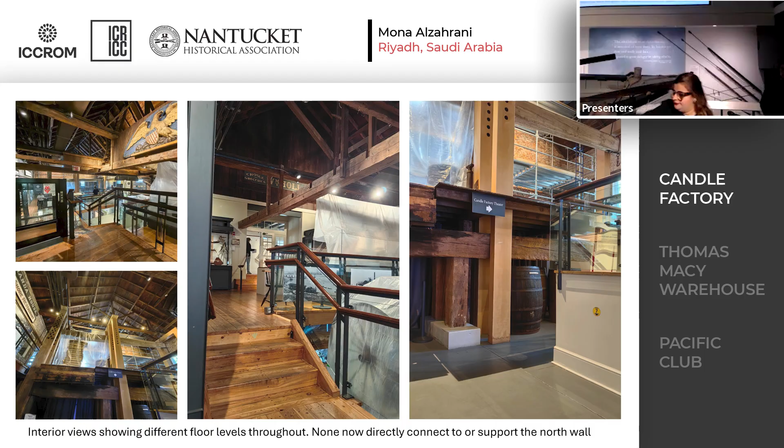The significance of the site: the candle factory, built in 1847, represents Nantucket's rich maritime heritage as part of the Hadwen and Barney oil and candle factory. It played a pivotal role in the island's 18th and 19th century whaling industry. The factory symbolizes the innovation and prosperity of its time, producing whale oil products that supported both local and global economies.

Today, the building is beautifully integrated into the Nantucket Whaling Museum. It has preserved its 19th century facade and ironworks, a testament to adaptive reuse, continuing to educate and inspire as part of the NHA's mission. At this point, I'd like to hand over the presentation to Andrea Richards, who will guide us through the material assessment and condition analysis of the candle factory.

So in order for us to fully understand what we're looking at for the condition assessment, we need to understand the materials that we're looking at. We did this by elevation. In the north elevation that you're looking at, this comprises asphalt shingles, timber eaves, brick masonry and mortar, single glazed timber windows, timber doors, granite lintel, granite masonry and mortar, and metal guttering, as well as a masonry chimney.

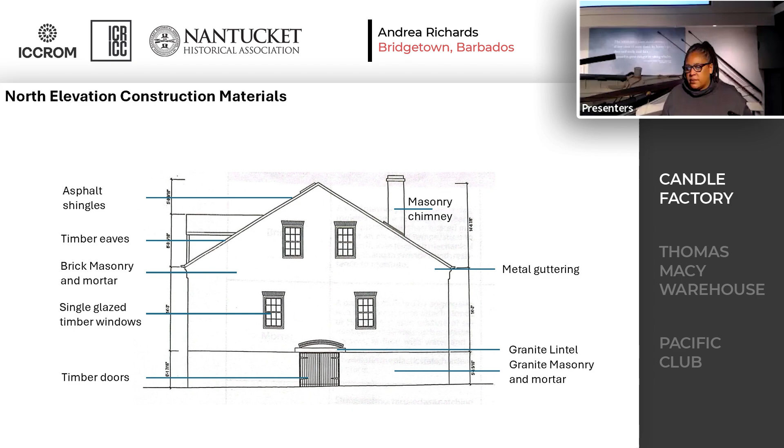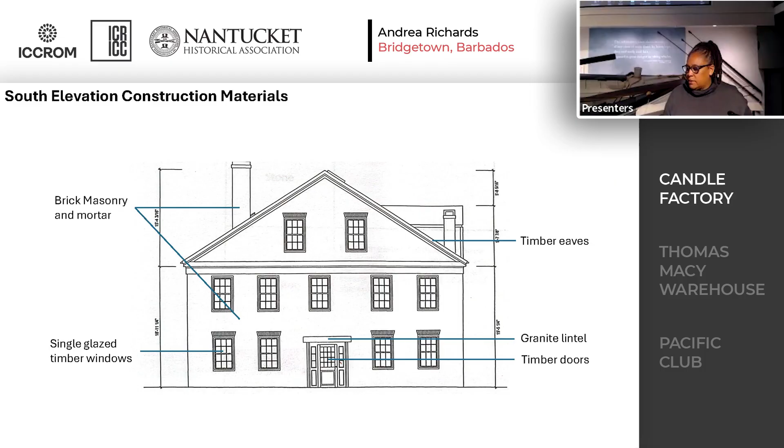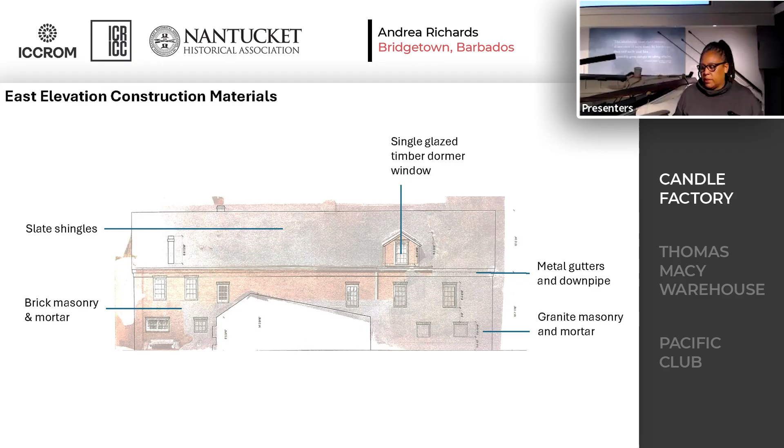For the south elevation, we have again brick masonry and mortar, single glazed windows, timber windows, granite lintel, timber doors, and timber eaves. We also assessed the eastern elevation where we had some slate shingles, brick masonry and mortar, metal gutters, and again some single glazed timber dormer windows, and granite masonry and mortar. I'll also add that from previous work done on the building, there was some cement in the mix as well.

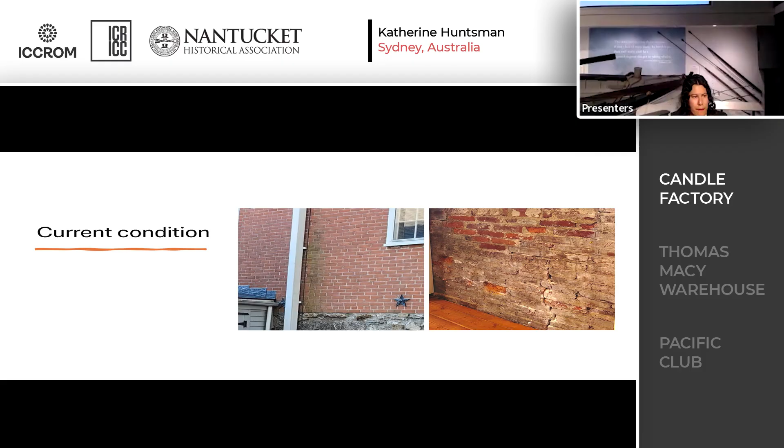This leads us to looking more deeply at the current condition of the former candle factory. I'll start with the west elevation, which is just here off to my left, your right, which we don't have a sketch of. But you can see that this western elevation was once an exterior wall that has since been incorporated into the Whaling Museum. We need to remember that this was once an external facade that experienced some of the weather we've been feeling outside today - the chill, the rain, water - and some of the other impacts that we observed on the other elevations.

So the south, what is now the front of the museum shop and the candle factory.

We observed some mortar loss at the base of the building at the southeast corner, as well as delamination of the paint around the windows from UV exposure from sunlight, because this is the elevation that gets the most direct sun and UV exposure.

Moving around to the back of the building, the north elevation, you may just be able to see through those top windows there, covered by scaffolding. This is the elevation that is undergoing the most intensive conservation efforts at the moment.

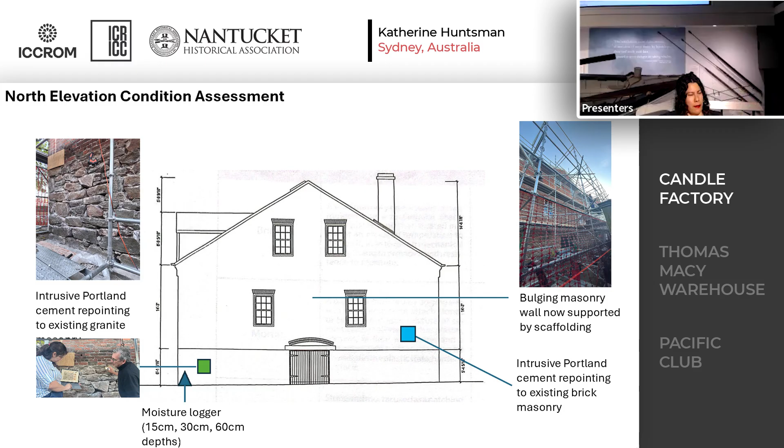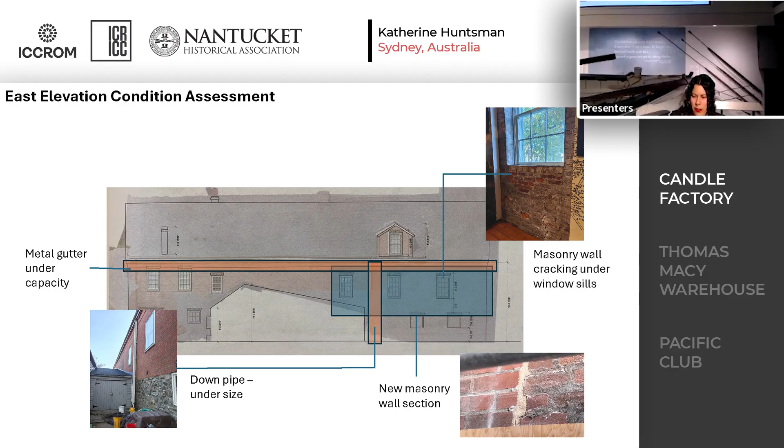At the east, we observed metal gutters and downpipes, rare for Nantucket in our understanding, though we suspect they may be under capacity for the amount of stormwater they are receiving, as well as cracking of several significant shapes and sizes throughout, particularly under windows and between the old and new sections of this masonry.

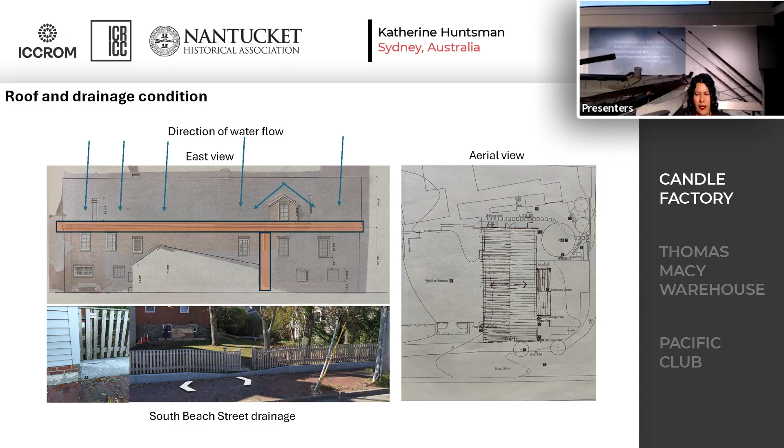We did a short study on the stormwater path and drainage of the roof into the garden at the back, what is now the garden at the back, onto South Beach Street.

The indoor environment of the candle factory, now museum interior, has been kept constant at what we like to express as museum best practice of 50% relative humidity and 22 to 23 degrees Celsius, or 73 Fahrenheit museum conditions.

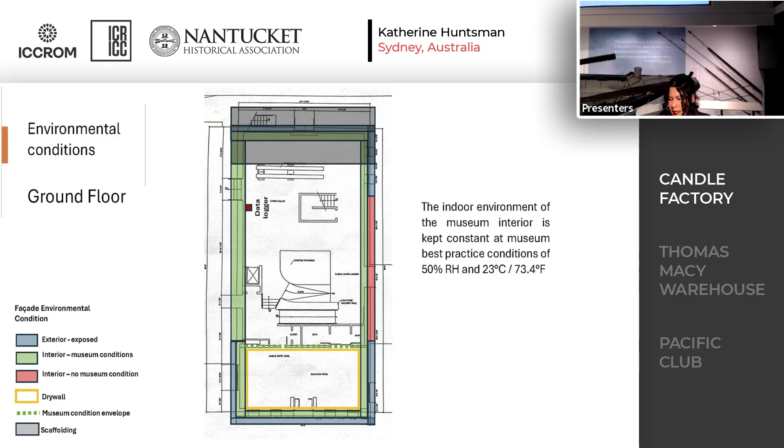However, this creates a disparity between the internal and external temperature and relative humidity of the site, which is actually degrading the masonry brickwork in the envelope of the building, as it's keeping the condition of the collection rather stable inside. And this continues onto the first floor.

This creates conditions for efflorescing salts, masonry cracks, and as I mentioned before, a lack of support for the entire north wall structure.

We also might see today, if this rain keeps up, some moisture ingress into the building. This collects particularly in the lower parts of the subfloor, and this has been observed previously at the bottom of the elevator pit off to the side here.

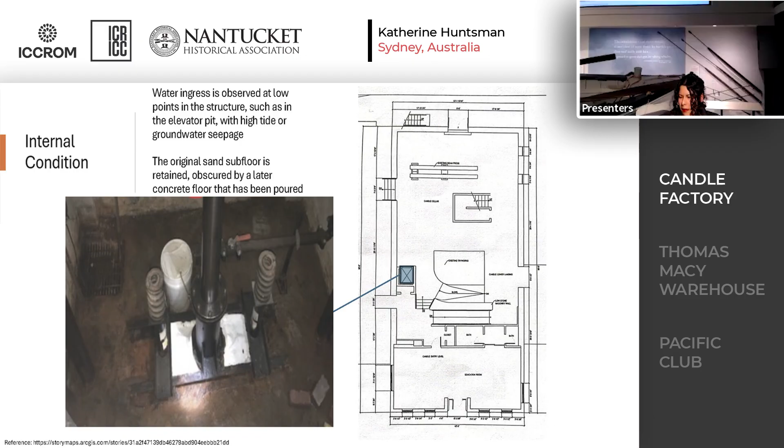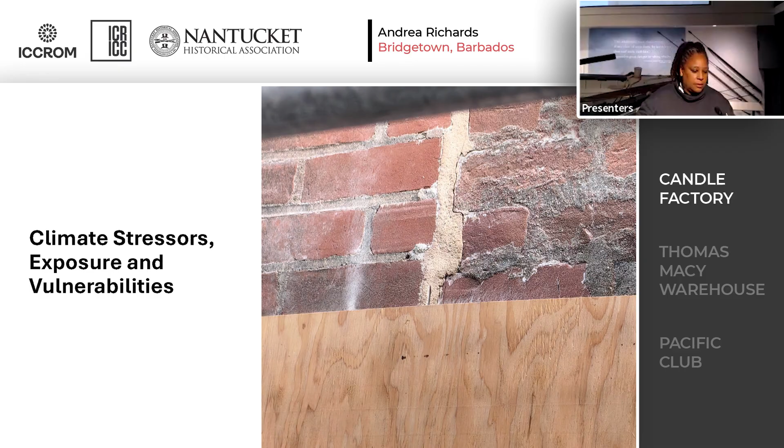Right, so now we go into the climate stressors and exposure, and in looking at our climate risk statement...

Due to higher sea levels as projected and the fact that we'll be having more flooding, this should continue to threaten the candle factory, simply because sea levels are expected to rise by 0.5 meters by 2050 and 2 meters by 2100. So what this leads us to is that the candle factory faces increasing risks also from biological growth, salt deposition, and moisture issues over time.

We estimate or project that 70 annual flood days are projected by 2050, and persistent flooding by 2100.

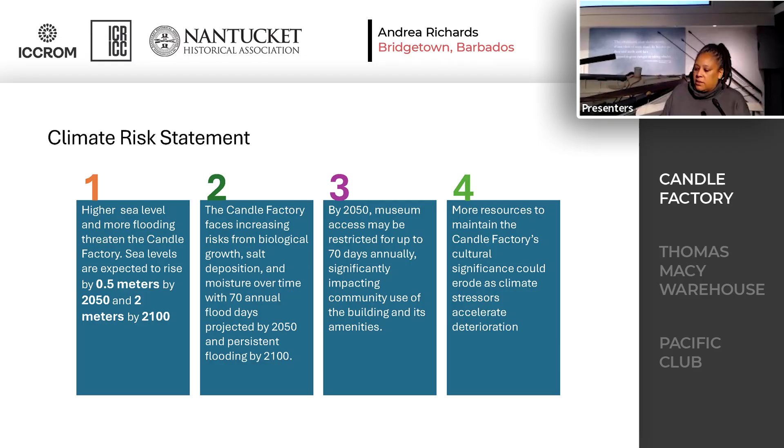By 2050, the museum access we believe will become restricted for up to 70 days annually, significantly impacting community use, the important social and cultural values of the site, and this will limit access in terms of the building and its amenities. So this will require more resources to maintain the candle factory's cultural and social significance, because this will be eroded as climate stressors accelerate and result in further deterioration.

Okay, moving to the prominent climate risks. So we identified that these are most of what we could observe in the different locations of the building: the rising sea level, flooding, increased precipitation, and erosion.

In terms of data, the sea level rise is a critical concern, as I said before, especially taking into consideration the location of the candle factory. As historical data and future prediction shows, by 2050 the predicted sea level rise at the site will reach 1.6 feet or plus 0.5 meters of the building, and by 2100, this could reach 2 meters or 6.5 feet.

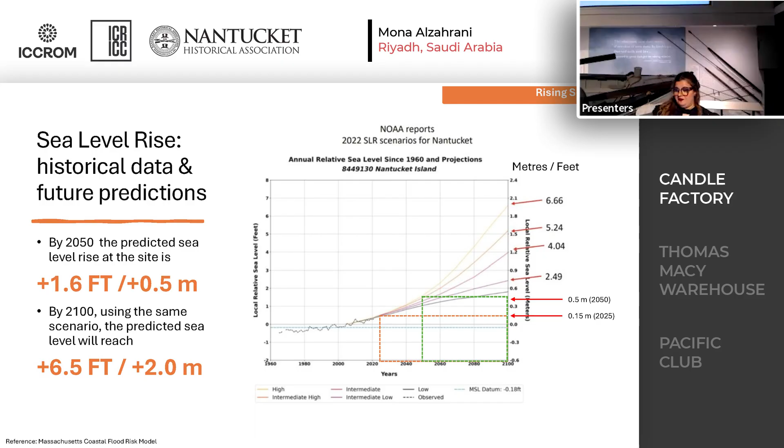The threat of flooding is both frequent and severe. By 2050, 70 flooding days per year is expected, as shown here in the data, and by 2100, the candle factory could experience permanent flooding. This will exacerbate structural deterioration and limit community use and accessibility to the building. The combination of high tide and increased precipitation highlights the urgent need for drainage improvements and flood barriers.

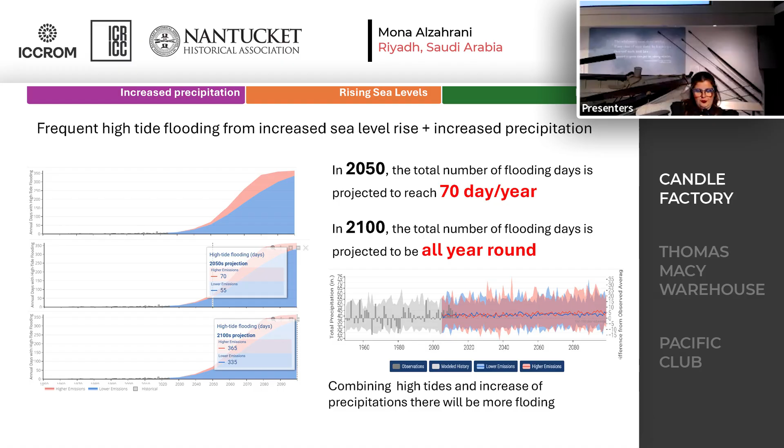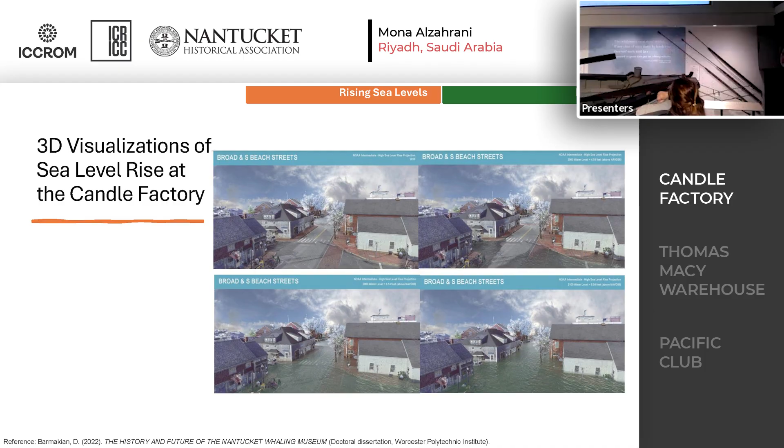And as my colleague here, Jose, will build on, these are some 3D visualizations. We found them nice in one of the NHA publications. As you can see, how the building will be flooded.

This rise of the sea level will affect the facades, causing an increase in humidity in masonry that will bring more salts and efflorescences in the walls. In the brick masonry, this will affect the appearance.

We possibly can recommend temporary water barriers. Those are available in the market for immediate stop of the water. We will show you later some pictures about that. And of course, the need of increasing the regular maintenance of the facades. That will be for the short term.

For the long term, something in the infrastructure of the houses, I mean the urban planning, should be done in terms of improving the drainage and also designing water permeable streets, which we will talk about later.

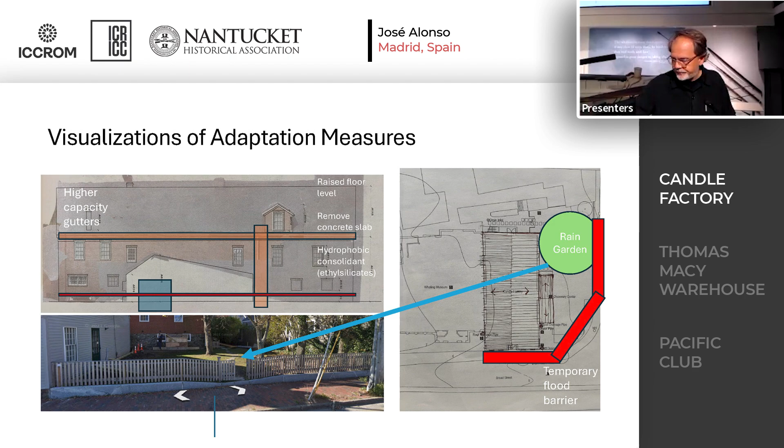So these are some sketches for strategies for reducing the hazards. On the left are commercial water barriers available in the market. They are prefab and can be installed in hours.

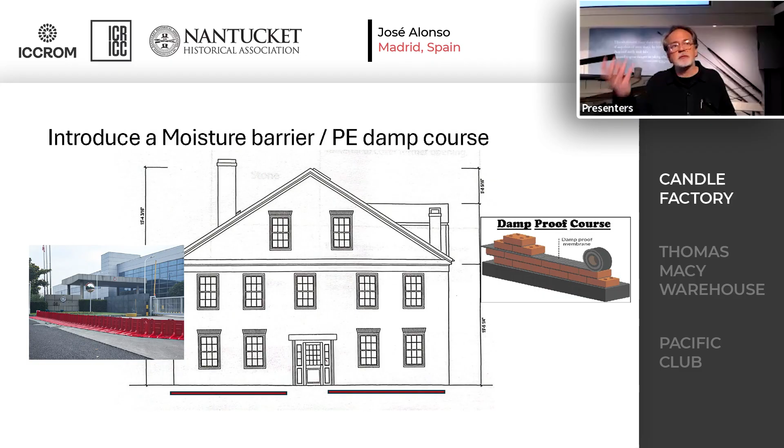We're also thinking about creating climate volunteers in the community who could help the museum, because we foresee more help will be needed for cleaning and assistance. On the right, the damp-proof course is a well-known conservation solution that helps prevent the water table from rising up the wall.

This is a sketch of the raise of the floor level. And that's all, we are open for discussion. Thank you very much on behalf of the whole team.

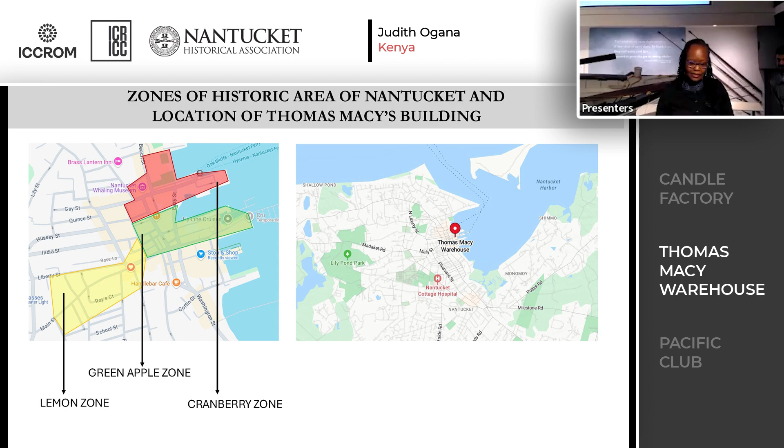The historic district area has been divided into 3 zones as a beginning to work on this project, and we have been working on the green zone. We're going to look at the Thomas Macy warehouse, where it's located on 12 Straight Wharf.

Based on the issues and property uses, we divided the zone into 4 subzones: the red one along the sea; the yellow and purple ones, which are most affected by flood and are mostly commercial uses; and the green area, which is mostly not affected by flood but is affected by rain.

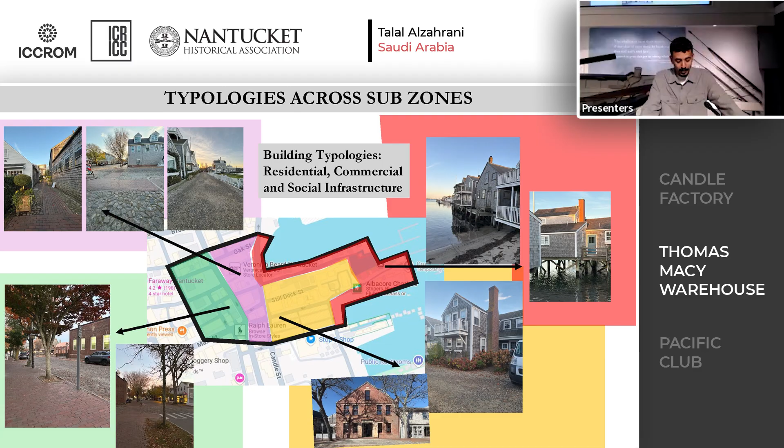This slide shows the variety of structures, streets, and walkways in this area.

Significance of the area: the district highlights the island's role as a 19th century whaling hub. The area has well-preserved buildings and cobblestone streets that reflect its past. The district offers educational opportunities to explore history, architecture, and traditional life, while also building a strong community spirit among locals and visitors.

Area-level condition assessments and issues: we found structural and non-structural issues, superficial and surface issues, water management issues, and policies and planning issues.

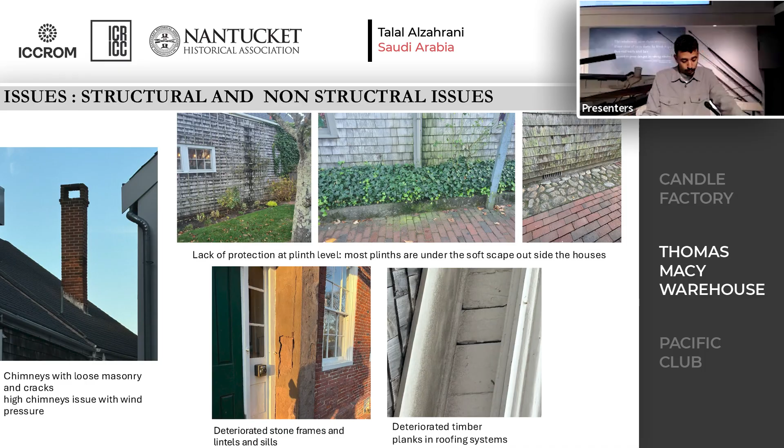This illustrates structural and non-structural issues, showing unprotected foundations, weak chimneys, and damaged roofs. We can also see other issues like structural cracks and weak conditions.

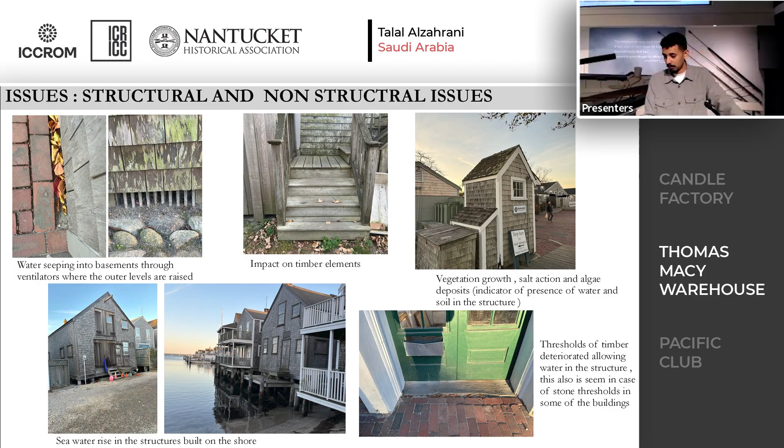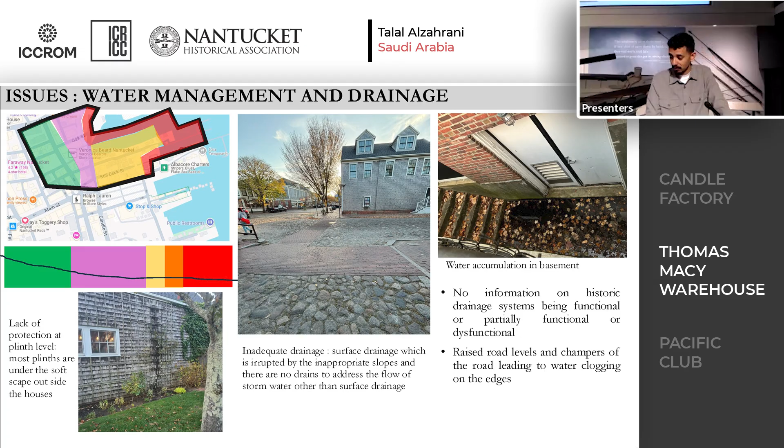Water management issues, including unprotected foundations and water accumulation in basements. Here are the issues of the water management, drainage system, and foundation issues as well.

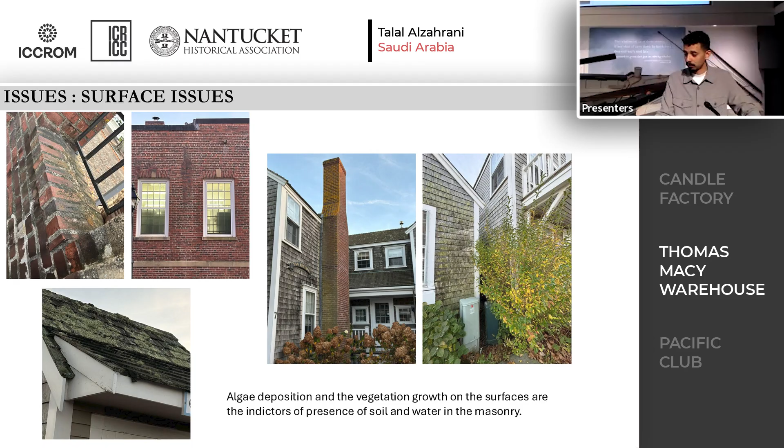The surface issues include moisture and vegetation growth.

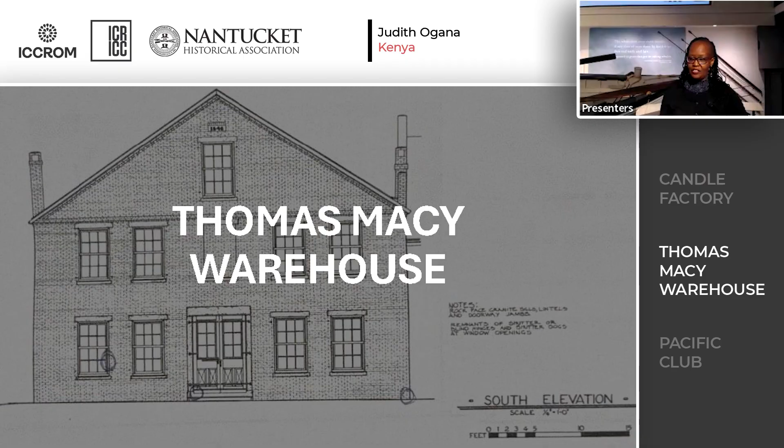Now we'll get into the building-level investigations of the Thomas Macy warehouse. We will start with the historical background, spatial planning, building description, then get into the elements and materials, condition assessment, and the causes of the conditions.

For the historical background, like the other team, we got quite a number of photographs from the archives, but we also recognize the importance of the history of the building, which was built in 1846 after the Great Fire. It is strategically located on the active waterfront on infill land. It used to be used as a supply store, dealing primarily with marine outfitting, and it is impressively built in Greek Revival industrial architectural style.

It has changed hands to several owners, including Macy's sons, who used it as a chandlery and warehouse. In 1905, there was a carpentry shop, and in 1944, the Nantucket Foundation Incorporated took ownership.

It has also been affected by events, including the Atlantic hurricane of 1944 and the floods in 1991. All that to say that it's an important building in Nantucket.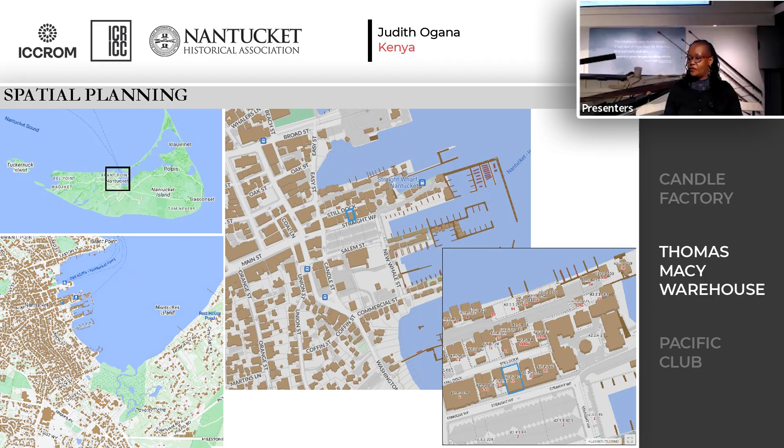In terms of spatial planning, you'll see how it is situated within the island. It's very important location-wise, currently very strategic, but also previously and historically for the whaling business, it was critical as well. The current scenario is shown in these photographs. The extent of the structure was larger than it currently is.

The main street connects to the ferry port. As you see the pictures on my right, that was the original entrance of the building, and the stairs were external. They have now been installed on the internal face of the building.

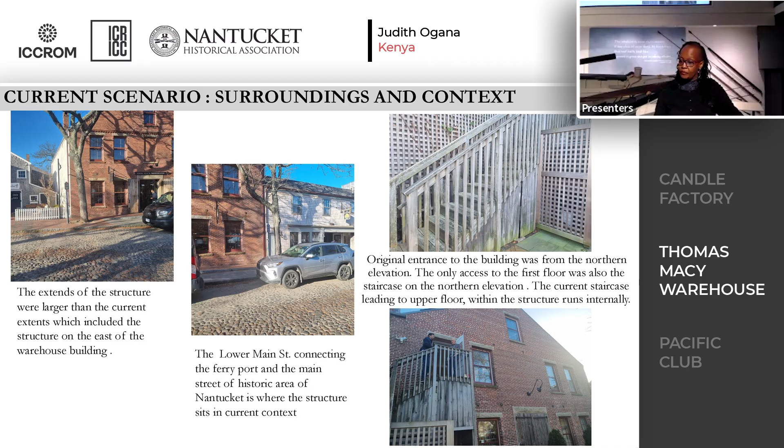Archival information is really important because it gives us a good sense of how the building has evolved. The first photo we have is from the 1960s, but there's also documentation from when it caught fire in 1944 and how it looked then, as well as the interiors that have a very strong aesthetic look that has actually been preserved over the years.

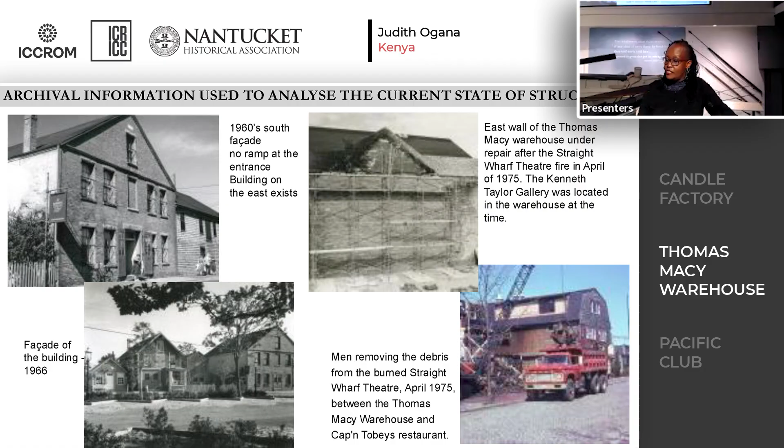You can see from the first photograph that the building did not have the ramp and the entrance. There is also documentation of the scaffolding and the work done when the building caught fire again in 1975, and the building works that happened thereafter.

Going on with the archival information, we see that the warehouse's west elevation had a different sort of architectural language, as well as the back door of the Macy warehouse in the middle photograph.

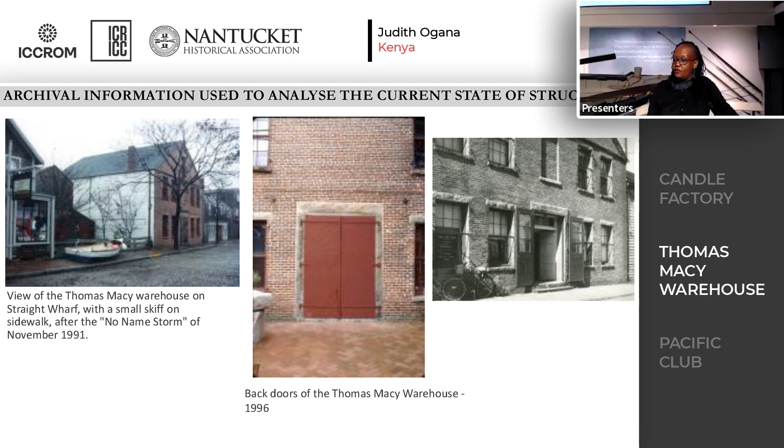In terms of architectural description and the floor plans, we will get deeper into the language of the architect. It houses an art exhibition space approximately 45 by 42, holding a grand hall and a vestibule. The walls are mainly brick in lime mortar, and the roofing consists of timber planks, timber joists and rafters. Flooring is timber planks with some concrete flooring, and the doors and wood windows have timber frames, sandstone lintels, sills and sandstone frames.

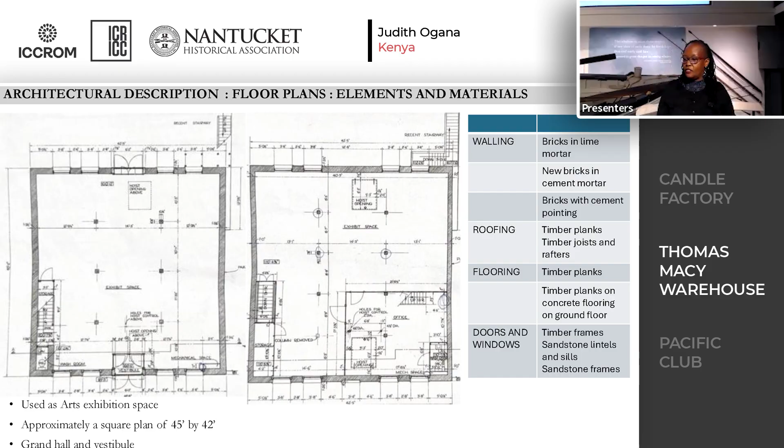So from here, I'll ask Ridhima to proceed with the presentation on the architectural description. Ridhima.

Hi everyone. From here, we'll largely be covering our methodology to assess the building on site, how we identified the issues the building is having, what the causes of those issues are, and then the proposals.

I'll take you through this slide, which shows the materials on the south facade and the condition of the building there. We've done this for all the facades, floors, roofing and RCPs, but we've just put one sample and a few other examples on these slides. As we see, the roof is slate, and the building is brick and lime mortar masonry.

There are sandstone lintels. Historic brick masonry in lime mortar is what we see on the facades, and there are timber panels on the door. The parapet was added later, and there are gutters and rainwater pipes. Sandstone lintels as well as sills are on the upper and lower levels. So this is the kind of material palette we see in the building on the southern facade.

There are some interventions in historic bricks, which are just cement pointing. The major issues this facade is dealing with are loose masonry with loss of mortar because of water ingress. We see both kinds of defects.

There is water seepage from the upper rooftop, and there is water rise as well. So what are the causes of this? I'll further cover. We also installed some moisture meters to identify the areas where water moisture is rising as we go up, or where it's decreasing, so that we know whether water seepage is coming from upwards or downwards.

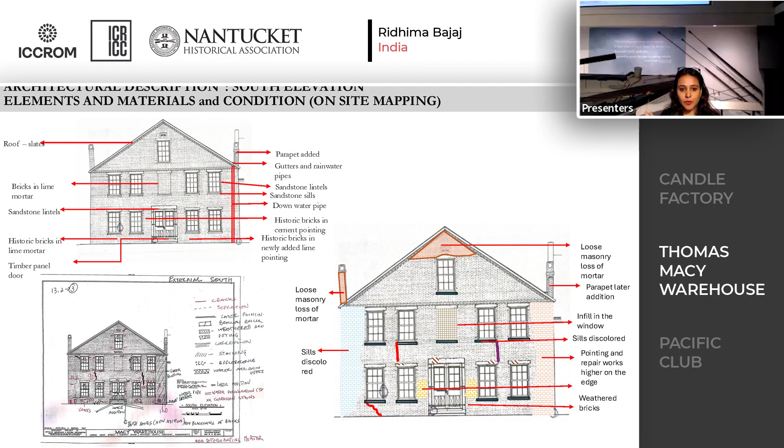That gives us an indicator of what is happening in each part of the masonry in terms of water seepage and water rise. We also see that the bricks were weathered and pitted. This was all water action as well as salt action, since this building is largely built on infill land over the sea, and the water table beneath it has a lot of salt. When the water rise happens, it leaves a lot of efflorescence on the brick and decays the mortar. So we are losing the mortar, and the bricks are getting pulverized, and on the lower courses it's seen much higher.

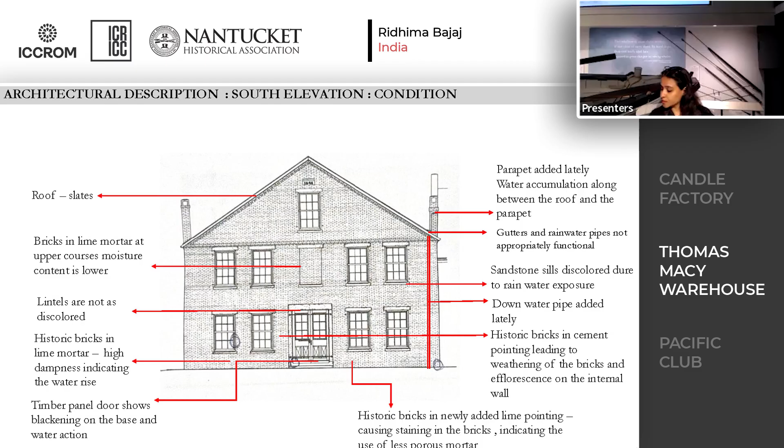Considering each facade separately, that's the condition of the south facade, which is a little more elaborately put. Whereas if we consider the west facade, we have a plastered wall.

A very interesting thing is that this plastered wall is not allowing the water to percolate, or it's not allowing the water to breathe. So the internal wall of this facade is actually seeing much more decay. The lower courses are much more pulverized, and the water moisture content goes up to 20, whereas on the other facades it is mostly 17 or 16. So the range of moisture is very high on this facade.

Then if we also look at the timber on this facade, it shows a lot of damp. The moisture content in the timber is very high, which is very rare to see, since timber doesn't hold water as much. But when we consider this facade and the structural system and check the timber moisture, the content is very high. So therefore, a lot of water is trapped on this facade.

If we go to the other facade... okay, so yeah, this is interesting. After doing all these studies, we also came up with a few questions that we need to answer through further investigation. One of them is: the moisture content decreases as we go upwards, whereas the action is opposite on the southwestern edge of the elevation. Why is that happening? Another question that arises is, when was the parapet added?

Through archival pictures, we do not get that information, but we do have certain kinds of information, such as that if the ramp is added in a particular period, the brick course masonry and plinth go below the ramp. This is an accelerator to water rise action and does not allow the water to breathe through the plinth of the building.

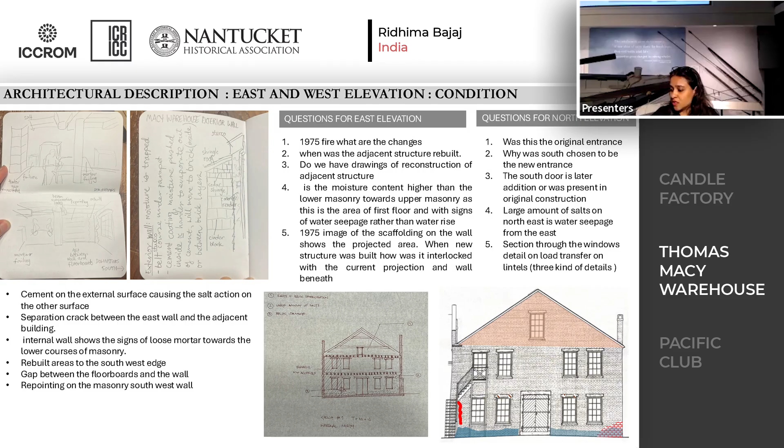So we have done a similar exercise. I'll just pass through this - you can ask any question for a particular facade if required. This is for the east elevation and west elevation. Then we have done a material-wise assessment of the kinds of issues seen in each of the materials. For brick, we see weathering and pitting - these are the kinds of different problems.

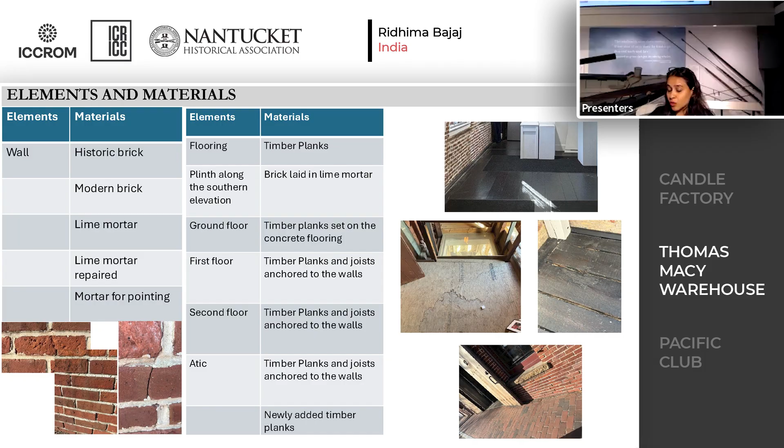Even what are the materials, which element is holding which material—that kind of assessment we have done through this study. So these are elements and material assessments.

Then we have assessed the building in terms of issues. We have divided into structural issues, non-structural issues, and surface issues, and we have found the cause of the issues and the accelerating factors which are increasing them.

Structural issues: we have looked into the cracks which are in timbers. These timbers are all supporting members, the roof structural timber members, which have heavy cracks. There's separation on one of the facades from the adjacent building. There are opening joints, cracks in the masonry, and cracks in stone lintels as well.

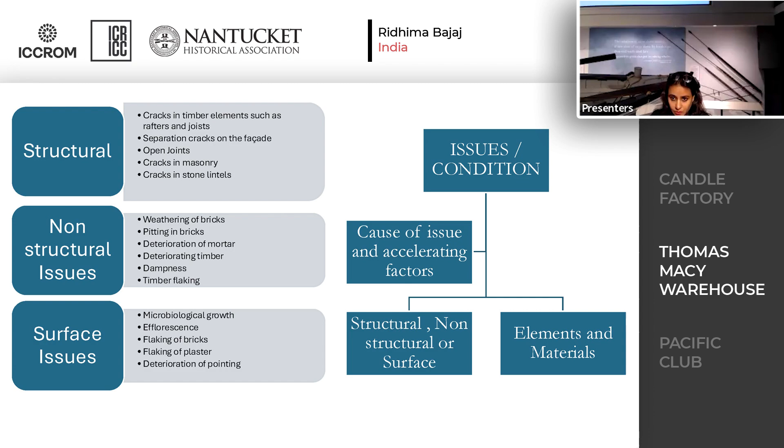The non-structural issues are weathering of bricks, pitting in bricks, deterioration of mortar, deteriorating timber, dampness, and timber flaking. Surface issues are largely efflorescence and flaking of bricks, but mostly this arises when there is water and salt in the building, indicating the presence of a lot of water and salt.

So that's a little more in detail—each structural issue shown through pictures. These are the non-structural issues.

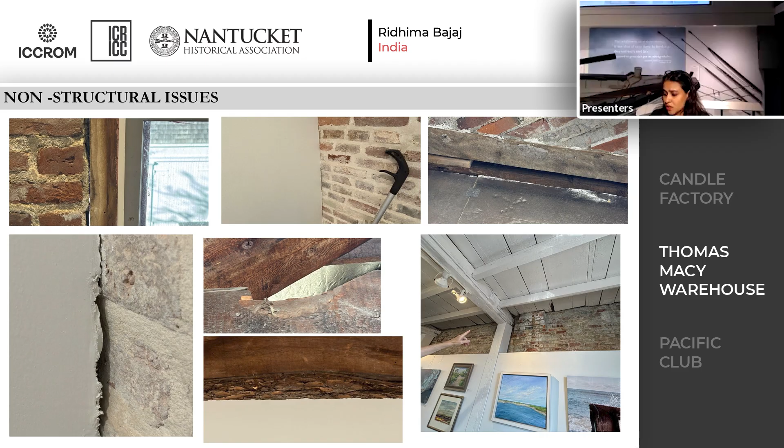We have done this understanding of each element—what materials it holds, what is the condition, and what is the cause of decay. We've just put one example here, but we have an entire study on each element, floor-wise, roof-wise, and wall-wise.

So this we have kind of assessed for significance. When we consider the material fabric of the building, we have considered it to be the value of the building, and the condition of the building is the risk to the building. We have given an assessment and seen which comes on higher priority.

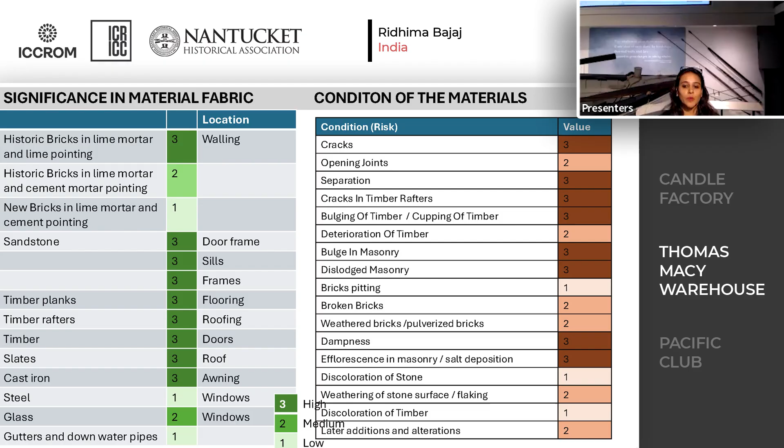If the value is high and the risk is high, we need to address it immediately—it becomes a priority. When the value is low and the risk is low, then it becomes lower priority to address immediately. So this is the assessment which we carried out.

Then we also have done a condition, material, and location study—where is it located? Because location matters: which material in the building is at what location, and therefore what kind of issues it's having. Water ingress can be one issue and pitting can be another, but where is it happening?

Is it happening on the lower courses of the masonry, or on the upper courses? That can have a different cause of the issue. So it's important to know the location, the material, and the condition to reach the cause of the problem. That's the kind of study we did.

And what are the underlying issues which indicate the role of a climate stressor? What is accelerating it? Suppose we are talking about flooding—the flooding is increasing the water ingress. So that becomes a kind of climate stressor for masonry being deteriorated or timber getting impacted. That's the kind of study we did in this exercise.

So we have chosen the climate stressor flooding for our detailed study, and the secondary stressors which arise are heavy rainfall and seawater rise.

Flooding causes waterlogging, which causes the water rise in the building, deteriorating the mortar and weathering the bricks, then weakening the walls, and the timber getting impacted, causing cracks and open joints. This is one of the graphics where we've done it for each material in detail.

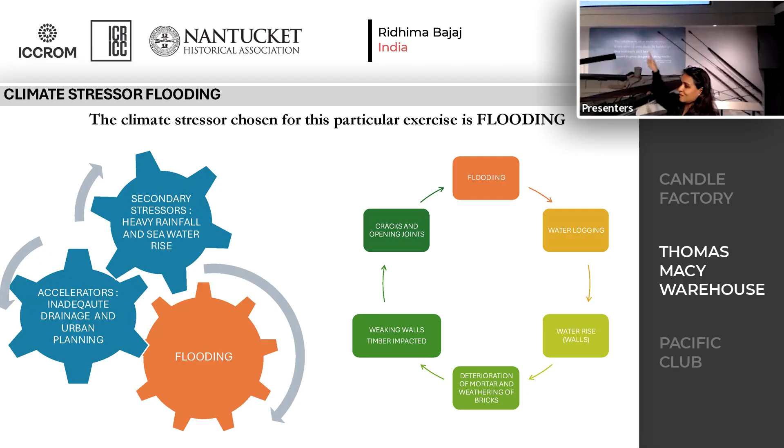So I'll go further. If we consider the climate stressor as flooding, the values of the building that are actually exposed are the settings in the surroundings of the building, the artifacts and paintings in the building, the external walls, and the roofing.

The vulnerabilities due to flooding: the access to the building gets blocked, and the ground floor of the structure gets flooded during the rainy season, which impacts materials as well as artifacts. The inadequate drainage and water management, and the gap at the policy and strategy level for management of stormwater drainage—including the interconnection between private buildings and public planning systems—is something that we found missing.

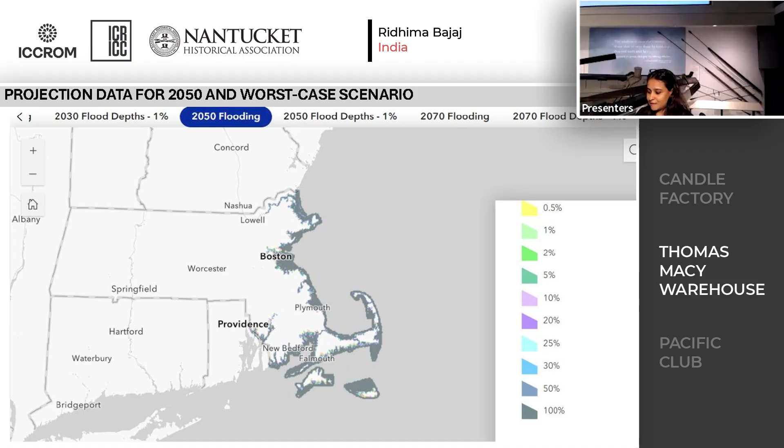So if we consider projection data, the flooding on the island, the coastal flooding, this indicates the flood risk map. If we see 2050 data, the island is flooded and part of the warehouse is completely flooded up to 20%, and this is above 10 feet by 2070.

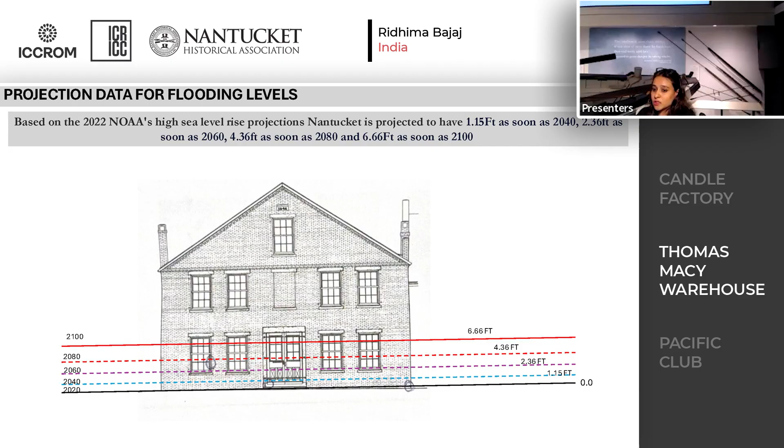By 2060, it goes up to 2.36, and by 2100, it is 6.6 feet, which means the entire ground floor is submerged into the building. So, Judy, could you please read this climate risk statement for Macy's building?

In terms of the statement, we say that Thomas Macy's warehouse is in an area prone to flooding, as you've seen. The number of floods were 6 in the 60s, 37 by 2017, and 75 in 2023, which shows a significant rise in the trend of flooding, translating to about a rise of 69 flood events in 65 years.

Approximate sea level rise has demonstrated a steady increase, with between 1950 and 2023 at 220 millimeters, and projected for 2050 at 450 millimeters and by 2100 at 1000 millimeters.

Macy Warehouse sits on infill land with underground seawater. There is inadequate drainage and inappropriate slopes around the structure. The gutters and drain downpipes are not functional. There is a gap in the interlinkage of private and public management systems of rainwater.

This dysfunctional stormwater management adds to the impact on the building. The building is of high architectural and associative value, with a functioning art gallery which is at physical risk due to flooding.

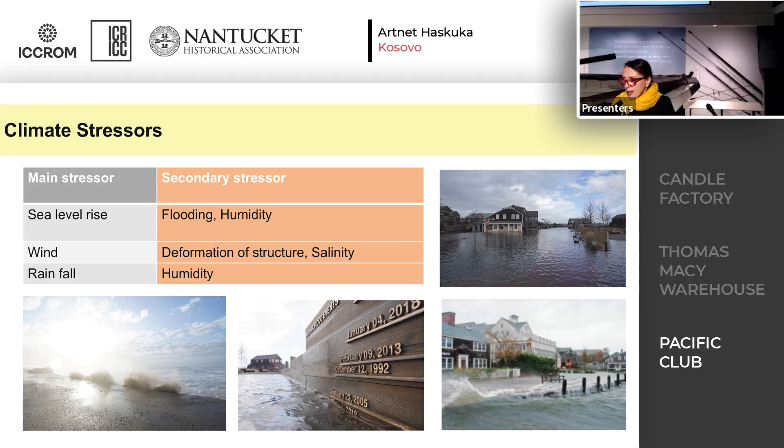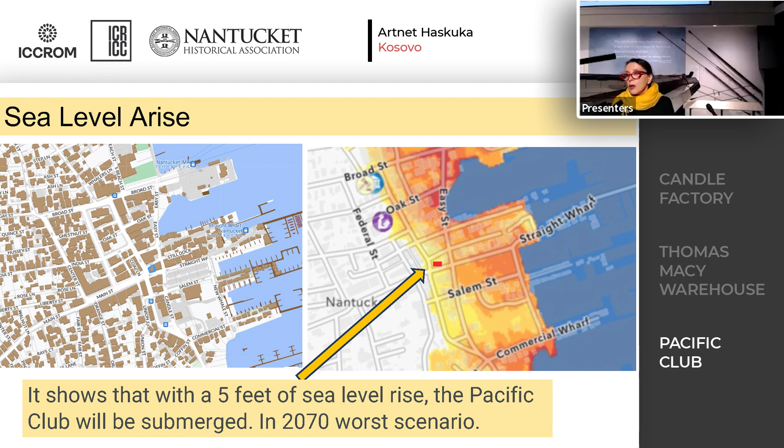There are some photos from the history of flooding in this area. We also analyzed a few scenarios, and in this slide you can see how the sea level will rise and the position of our building, where in 2070 the worst scenario is that we will lose this building.

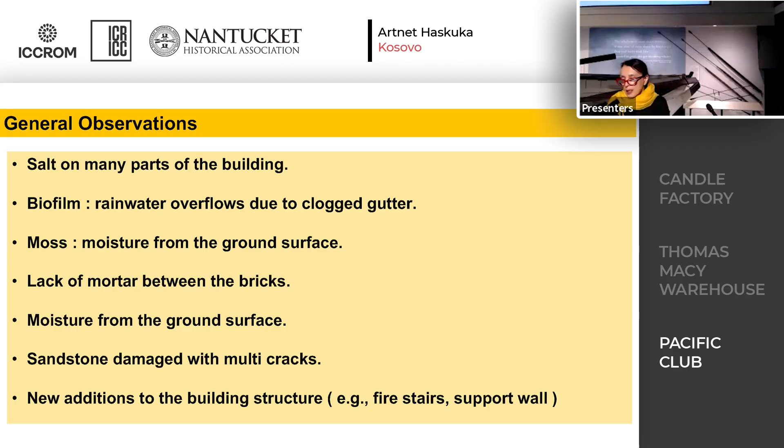Existing situation, as you see, it is not the best one. We have some biofilm and then cracks, some deterioration in the facade. There are general observations that we saw: salt on many parts of the building, biofilm, moss, lack of mortar between the bricks, moisture from the ground surface. Then sandstone is damaged with multi-cracks, and also there is a new additional part in the building structure.

Let's see from the west elevation. The northwest corner is the most damaged because the gutter is filled with a lot of fallen leaves, so the rainfall overflows and rainwater damages this corner, and biofilm has occurred. The rainfall is also causing deterioration of the roof surface.

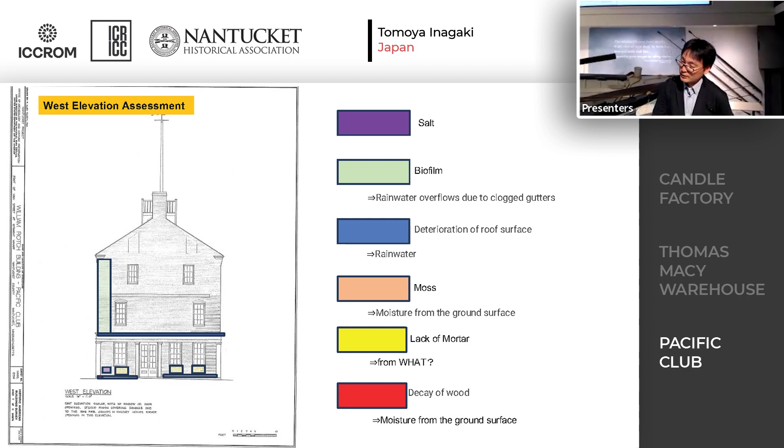Moisture from the ground surface has occurred. In the south elevation, we found sandstone damage like this. In the north elevation, we see new elements from the ground, like this additional stairs structure. The surface damage was caused by iron rust on the stairs.

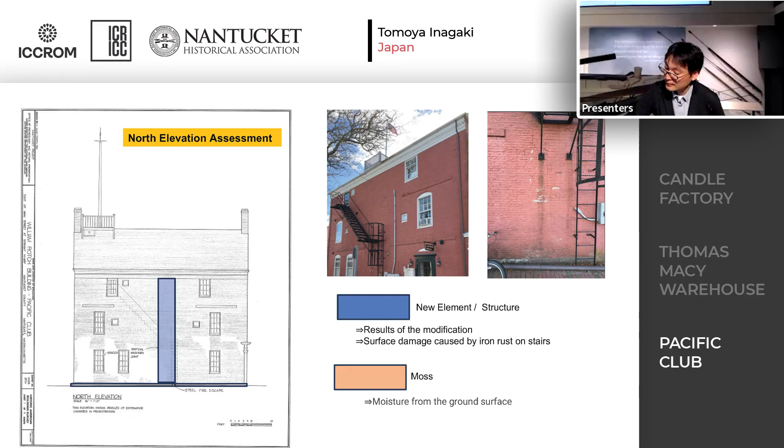The east elevation is sufficient. On the next slide, we have shocking photos. We saw the basement is submerged now. So this is not a future story - this is happening now. It's an ongoing issue.

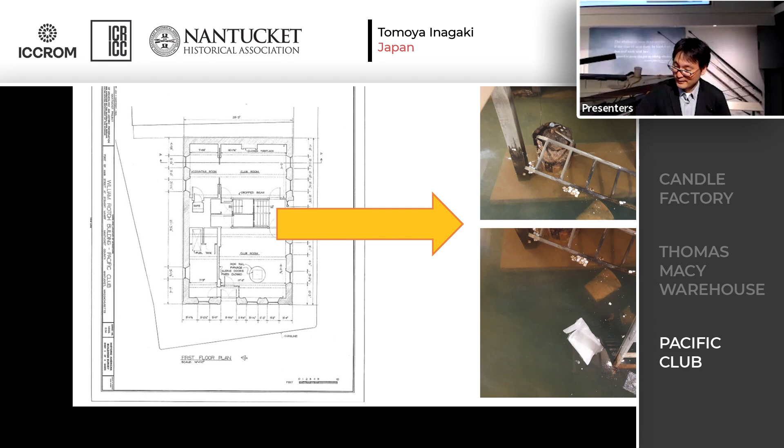Inside the building, the first floor and the second floor are renovated, and on the third floor you can see the fresco. This building also has a very beautiful timber truss, a wooden truss. This truss is very old, and it may be the original one.

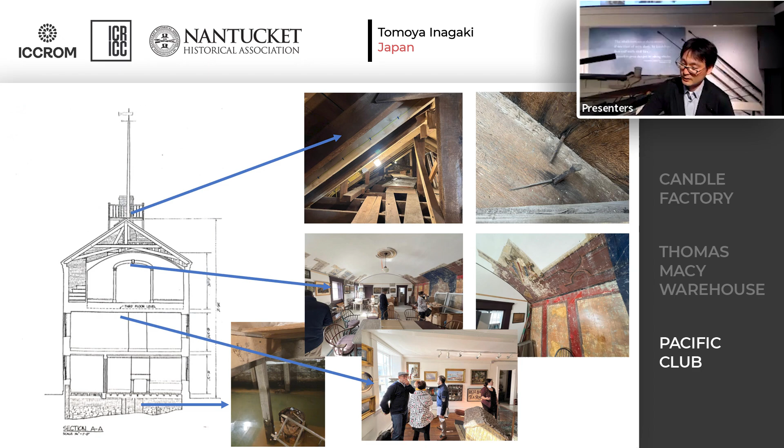During this process, it was important for us to analyze each element and its material with the condition that it has.

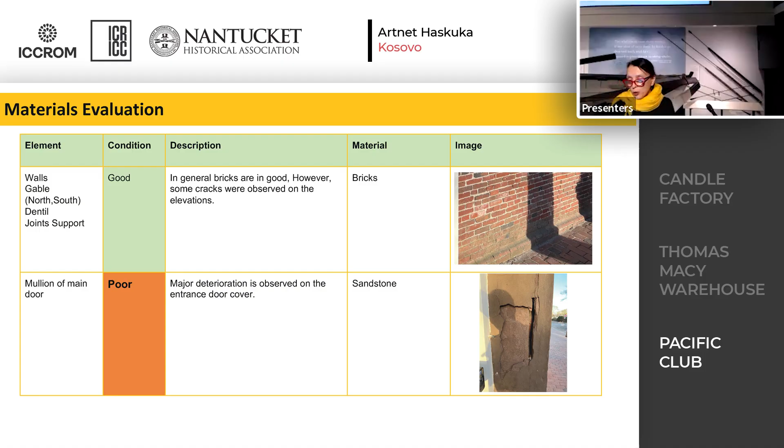For example, walls made from bricks are in good condition, and the gable as well is in good condition from bricks. What was in poor condition was the entrance, made from sandstone. We also analyzed openings like windows, which were made from wood and were in very good condition. Then external staircases made from metal were also in very good condition.

So considering all the previous analysis and the condition analysis for the building, we started our adaptation measures for the building to protect it from climate change circumstances.

So we start with the climate risk assessment. We consider the historical value of the building first of all. Then we also take into consideration the climate stressors we already mentioned.

For instance, for the flood, we expected that the flood risk will be increased by 0.1% by 2050 - this is the best case scenario - and also it will be increased by 0.5% by 2070. This actually leads us to take real measurements to protect the building in terms of structural and physical elements, like the structure and materials, as well as in the long term for policies and legislation.

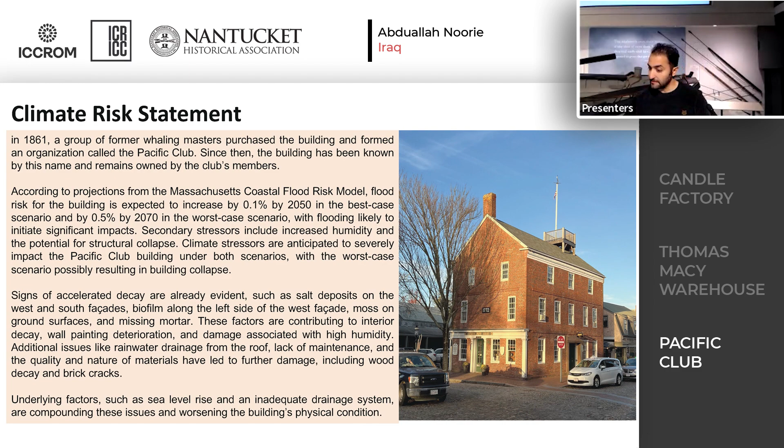So based on that, we started developing our climate adaptation action plan, which is divided into the following elements. The first one is identifying the risk mitigation measure.

Then we determine the implementation - is it long term or short term? Also the cost. And on the other hand, we're also measuring if it's on the site level, city, national, or local level.

So we started with the short-term measurements for the building. As my colleagues mentioned, there is a lot of underground water in the basement, so as an immediate measure, we are installing a small pumping station to pump water from outside the building, and also to provide mechanical ventilation just to reduce moisture risks and so on.

And also to add some reinforcement for the building, like for the structure and materials. On the other hand, we have long-term measurements.

The first part of it is about the structure, and the second one about the policies.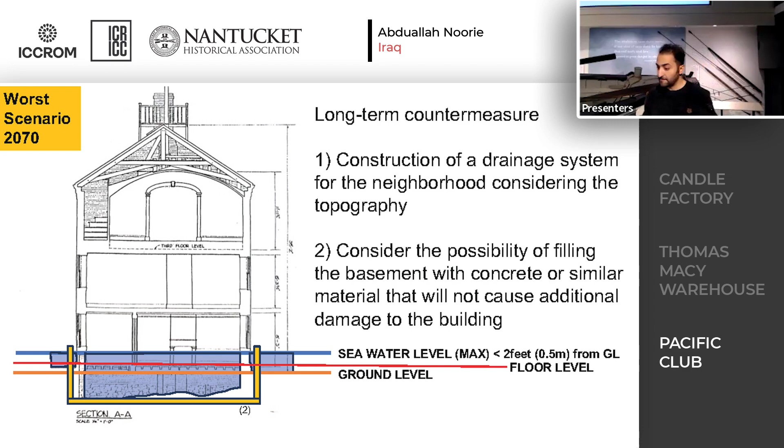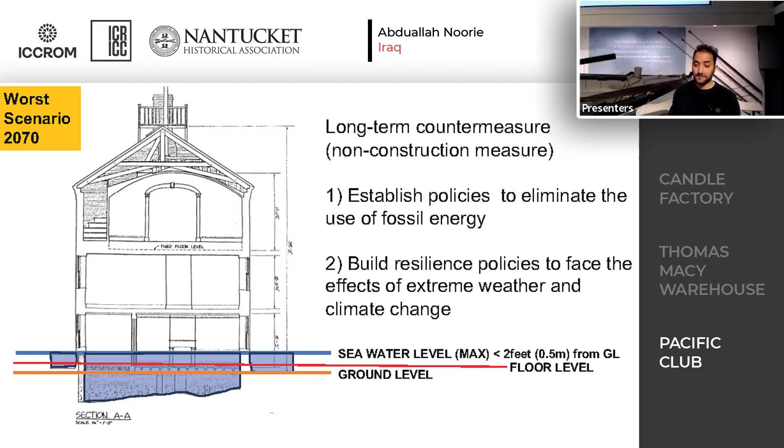For the long term, or non-construction measures, we thought we should establish policies to use renewable energy instead of fossil energy, and also build resilience policy to face the effects of weather and climate change. Regarding fossil energy and extreme weather, we also have another factor impacting the building, which is traffic pollution. There are lots of trucks that go and park on the street, and this has highly affected the structure and materials of the building.

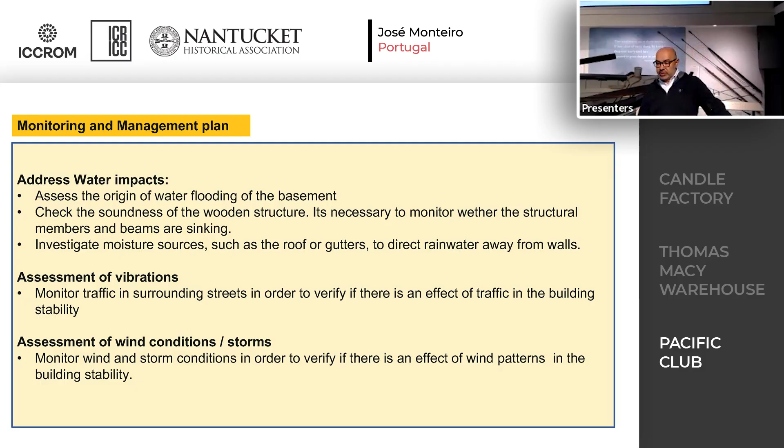And that's all from us. Thank you.

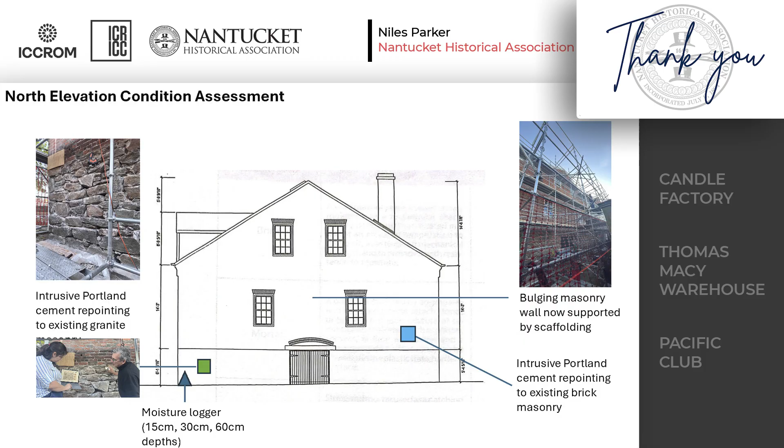And in some ways, I think it never ends. As conditions change and as we adjust our understanding, we've got to be nimble and remain flexible in terms of how we continue to forecast and how we have up-to-date financial impacts that we can make better decisions around. I think the town is doing some of that as well.

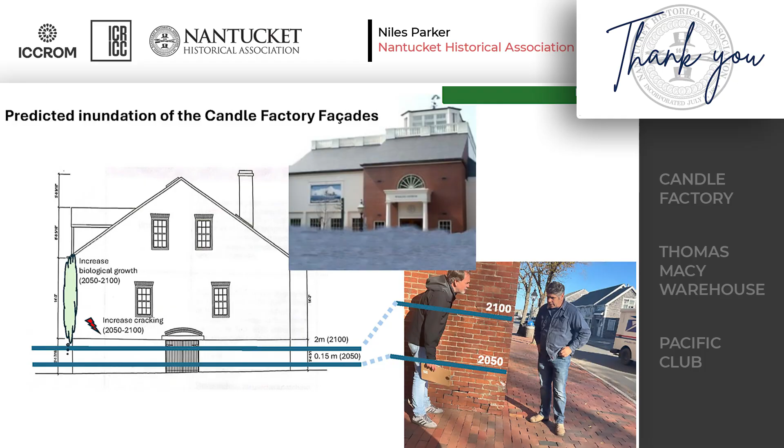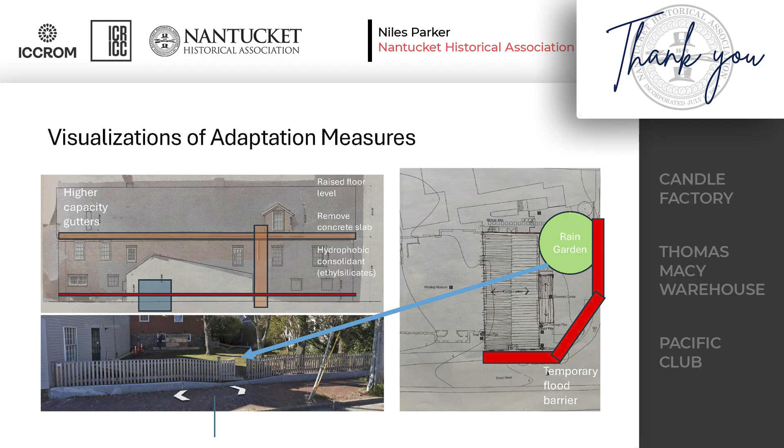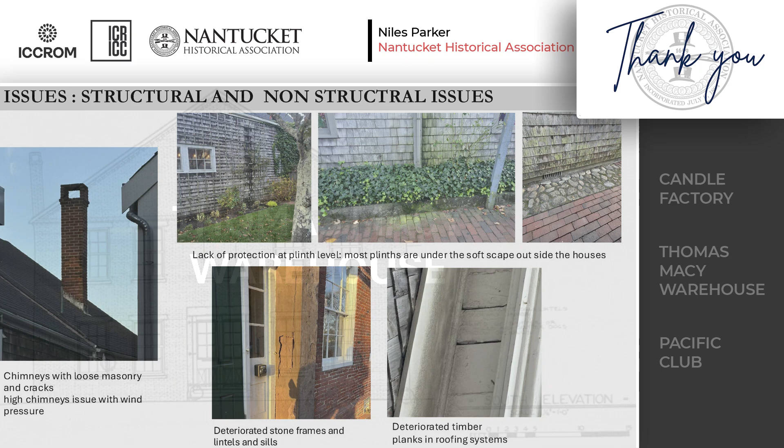I think some of what I've heard today has been discussed at the town level. One thing that I think is really critical, that's been said many times, is that the collection of stormwater and groundwater is pivotal for downtown. There are some easy things that can be done by the property owner, by the town of Nantucket, to better collect and direct stormwater that I think can make a massive difference to us, particularly in certain areas downtown - kind of a bathtub right where we are standing right now.

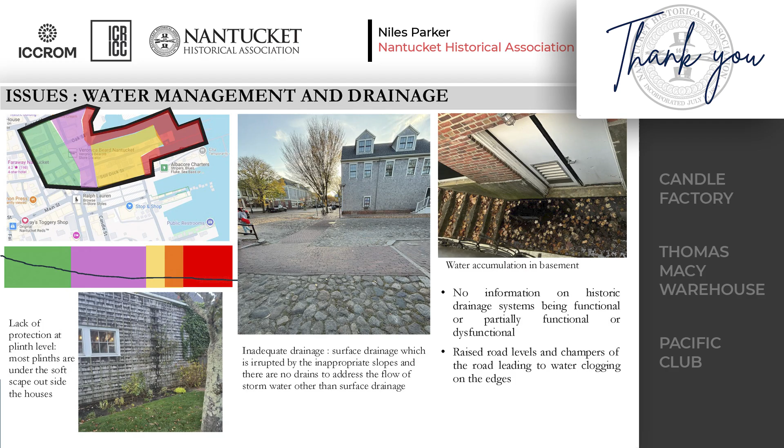And so how do we anticipate that? How do we shape that? How do we improve that? That has to be a collaborative effort with other organizations, with private property owners, and with the town itself. And I guess that kind of gets me to the last point I wanted to make before I have to duck into that meeting.

I don't know that we ever get out of this. I think this is the new normal in some ways, but I think it helps us identify steps we can take that will improve the situation. What we as an organization can do is one thing. What we as a couple of organizations in town can do, and what we as the town and a couple of organizations on the entire island can do is one thing, but it obviously goes beyond that.

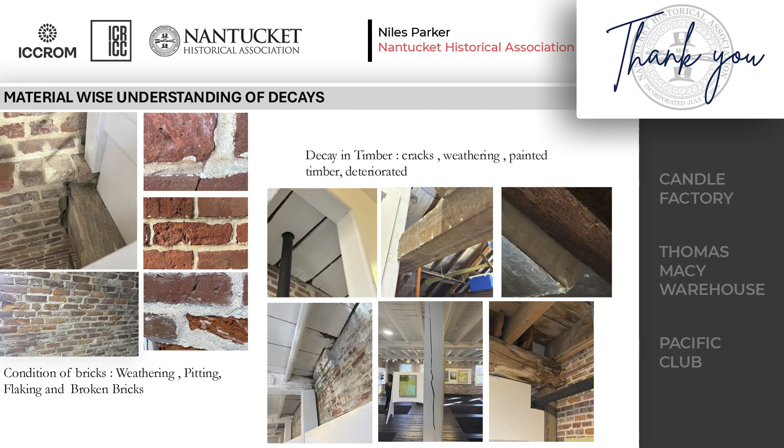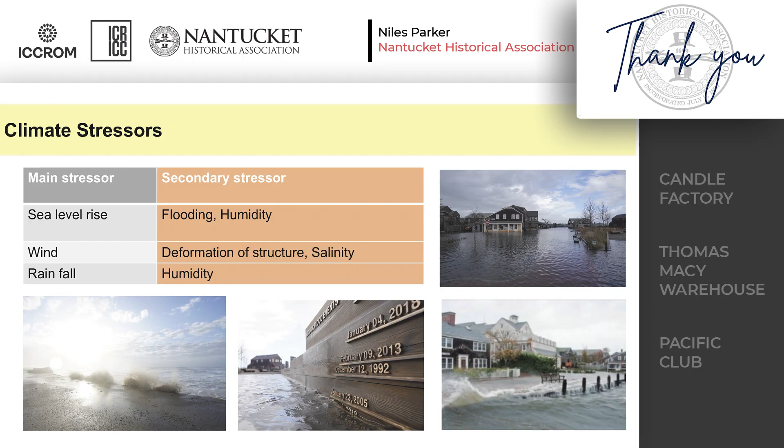And I think one of the things that I like about this program so much is that all of you are going back to your homes and doing the same thing. You're working independently and a little bit wider with your local town and government, with other organizations, or with your country. And then it's how do we connect that? How do we work together? I think the only way we improve this is how do we work together - at the local level, the national level, and the international level.

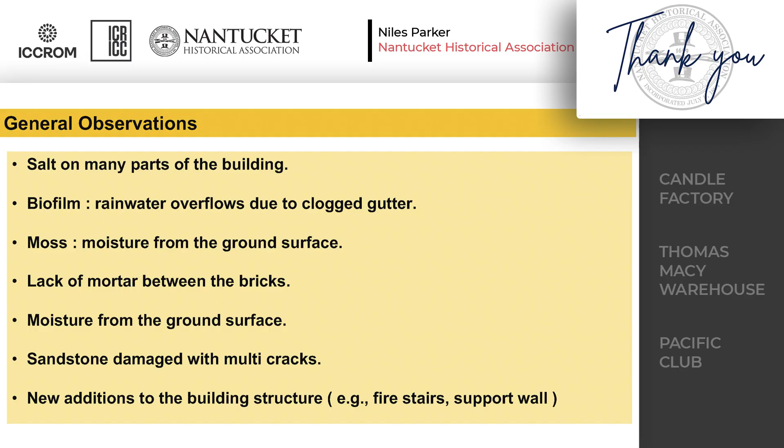And so what I take away from this is that we have only just begun. And I'm grateful for the work that you have done during the past several weeks. And I'm especially excited about the work we will do going forward.

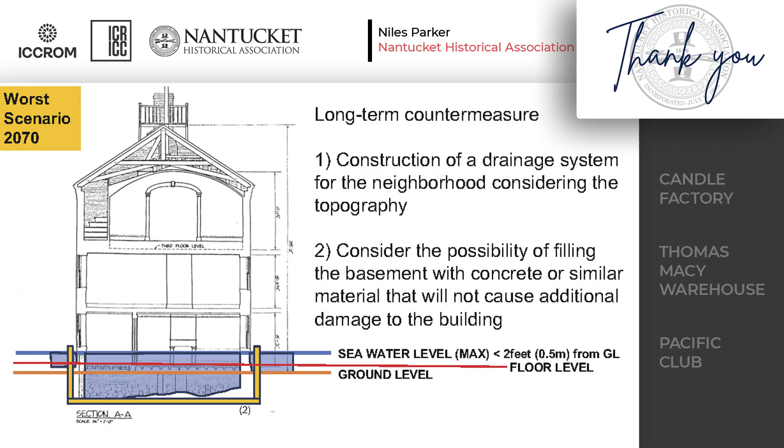So with that, I'm gonna duck out. I hope conversation will continue. Again, my thanks to all of you on behalf of the NHA, on behalf of Nantucket, for your dedication and hard work over the last several weeks here on the island.

Looking forward to tomorrow's discussion where we get to hear about your work. And again, what I love to hear is how your experience here maybe has shifted some of your thinking, or how you're now looking anew at the problems and the projects that you're working on back home. And I hope that you'll carry that with you.